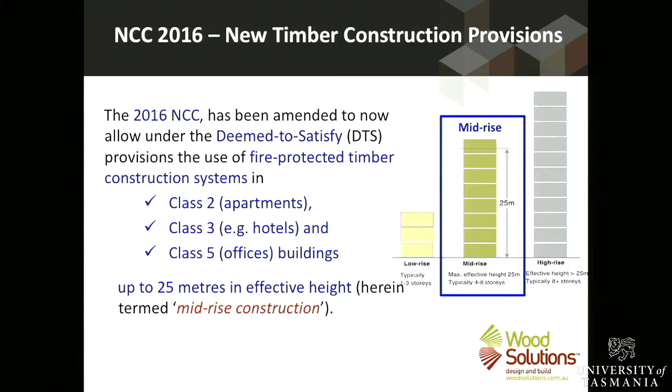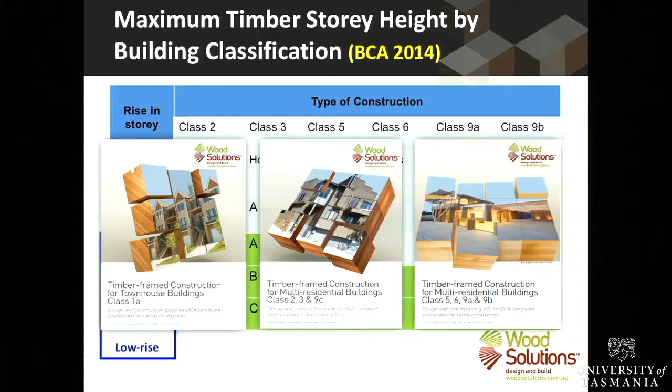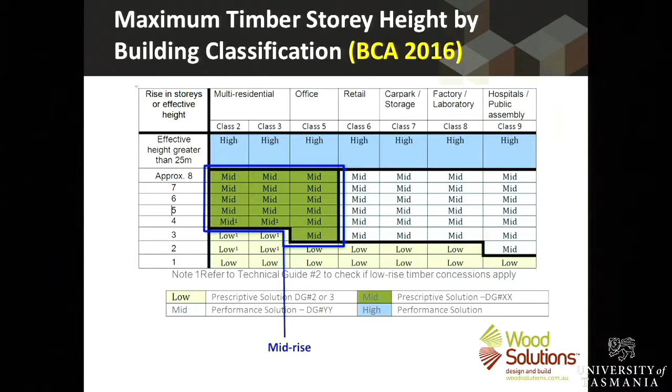The new system establishes this mid-rise construction arrangement, and then sets up a series of concessions which allow you to use different construction arrangements to get to that 8-storey, 25-metre mark. That's covered in this new guide, Guide 37.

There's now a lot of these timber design guides. They're very useful and cover a wide range of topics. If you're not logged in or don't have a registration on the Wood Solutions site, I encourage you to log in and get one. It's all free, download the guides relevant to you. They deal with everything from interior design, external finishing, fire separation, and different construction systems, and they're all pretty easy to use.

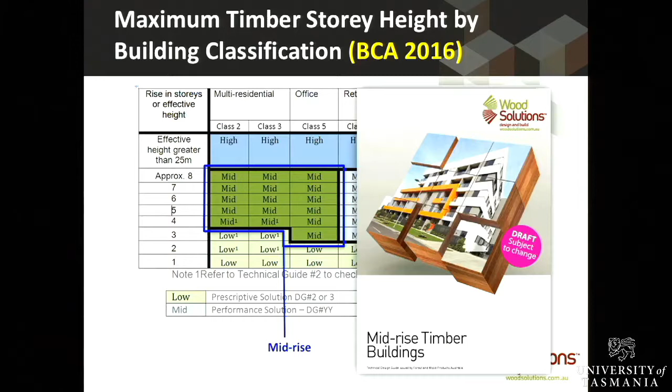The new DTS provisions cover traditional lightweight framing options, plus what it calls massive timber systems, such as CLT, glulam, and LVL. It consists of using appropriate layers of fire-resistant plasterboard to make what it calls fire-protected timber, combined with a compliant sprinkler system.

So what it gives you is a whole range of opportunities for class 2, 3 and 5 buildings, and ways in which they can be constructed.

So if we just look at some of the construction options that are available nationally.

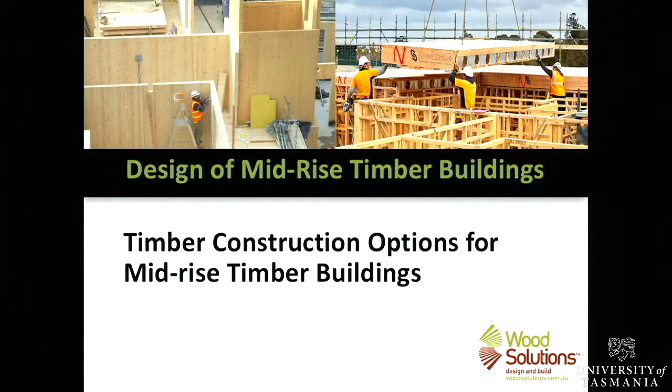We've got general framing systems, basically taking single elements and using them to make either a structural frame or a wall frame. We've got lightweight frames, heavy timber post and beam, post-tensioned portals. There's massive timber, which is panel walls or floor systems, and then a range of modular systems. I've got a slide on each one of these.

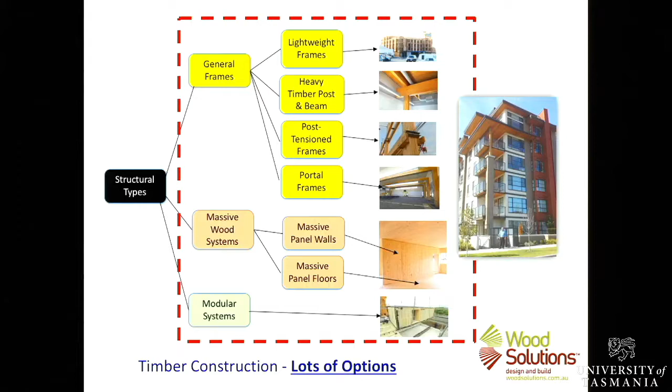If we look at some design approaches with class 2 and 3 buildings, they tend to be honeycomb style construction, with relatively close walls - honeycomb type structures. We're not dealing with posts and open floor plates, and these can be constructed in several ways.

One way is to use lightweight construction up to about 6 stories. This is an adaptation of a standard timber frame wall, where you've got two wall systems side by side to give you sound separation between apartments, using double studs. You use double studs because of the compression from loads above - a single stud won't do it. You could try to buy a bigger piece, but no one generally makes them, so everything's cut at a 35 or 45 size, and you just double them up.

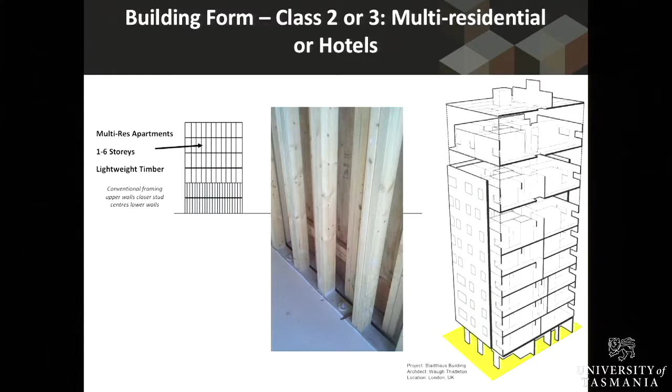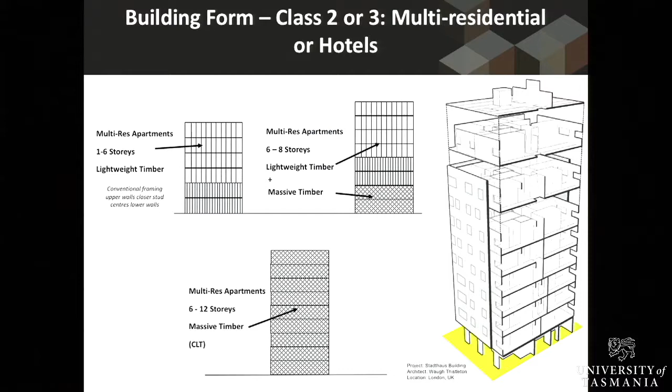Other approaches are to use lightweight above and massive timber below, so that on floors with higher loads, as you move down you go to full massive timber systems, or you use full massive timber all the way from base up. There's also ways to take a combination of concrete and timber systems, with concrete on lower levels for things like car parks and retail, then a concrete plinth with your timber frame directly above that.

There has been sufficient practice in multi-storey timber construction now in Europe and other places that a lot of the jointing systems needed to get very high shear values in some of these panels have now been resolved, and they're actually available in the marketplace if you know the right people to ask. I'm one of the right people to ask - I can't deliver any of them, but I can point you in the direction of people who can.

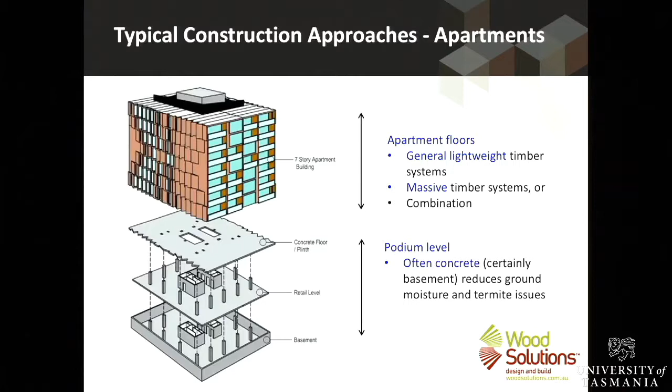Others use heavy timber post and beam with glulam or CLT. That's the Lend-Lease building, the Docklands Museum, Docklands Library - predominantly a glulam building with CLT floor plates and CLT shear walls in the centre. You can see from the basic structure, we've got shear walls in the middle that are CLT, floor plates between the glulam frames, and large glulam columns. They all came as a package. Then we've got portal frame systems.

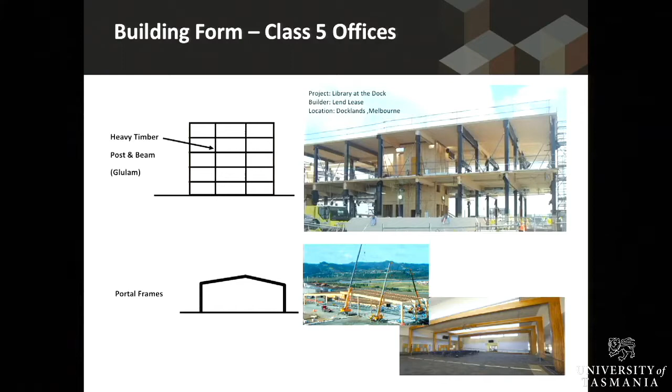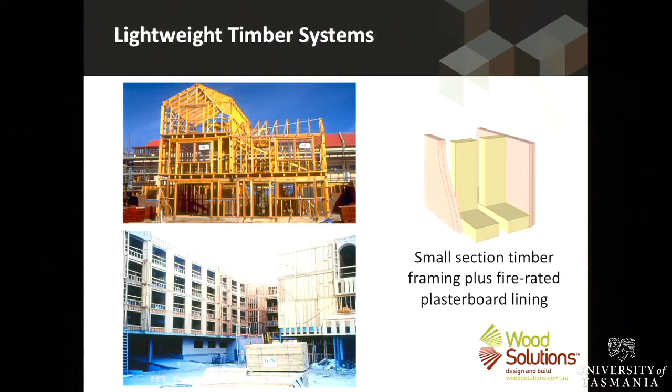If we look at other frame systems, we've got the lightweight timber systems - effectively standard stud framing arrangements. This was the traditional method for building up to 3 to 5 stories, an extension of house construction but with lots of extra detailing. This arrangement here is concrete floor, 4 stories up - I think that one's in Melbourne.

You've got post and beam construction using LVL and glulam. Now these panels here, and the ones in the shear walls, aren't CLT - they're actually large panels of glulam side by side. So you don't have the cross laminates, only boards arranged vertically, which forms large flat beams or shear walls that you can use. These are projects in British Columbia.

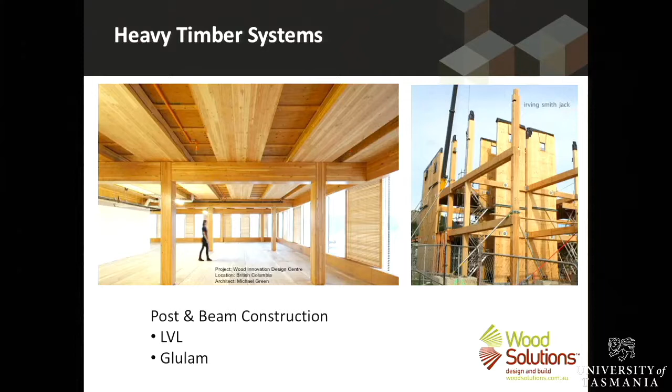There's then post and pre-stressed LVL and glulam composite beam systems. This is put together as a system called Expan, funded jointly by Forest and Wood Products Australia and a similar organisation in New Zealand. Effectively what it does is take large-scale timber elements like this and combine steel tendons in the system to allow you to build relatively flexible joints in the structure.

It was specifically designed for resistance to earthquakes in New Zealand. This project actually started prior to the big earthquake in Christchurch. Several of the buildings built in Christchurch in the recovery effort have used this system because they can sustain another earthquake and then just be tightened up again. You incorporate the steel tendon in a box beam like one of these, or you can expose it underneath, etc.

It's an adaptation of quite an old technology, very common in Victorian buildings and other types of buildings over the ages, but here used in a much more sophisticated manner. The design software and detailing is all available through FWPA. They've just released a whole series of guides on this system, if anybody's interested.

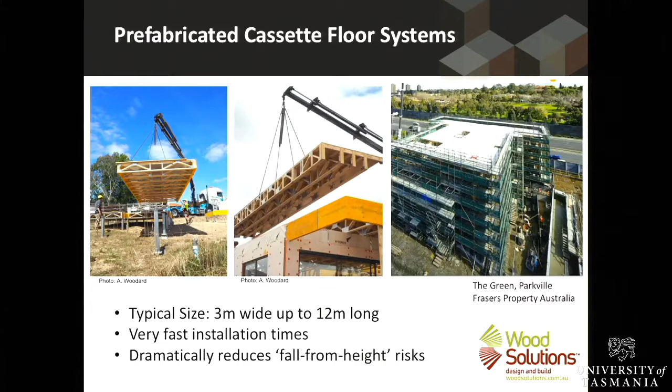There's a whole range of prefabricated systems being used. These ones are relatively domestic scale, being floor cassettes. Larger scale ones were used in a job in Parkville in Melbourne, with spans up to 12 metres.

There's also a whole series of concrete timber composite systems that are now being used or proposed. In some cases in Australia it's basically being proposed, in other places they're being used. This is an old photograph of a system whereby joists were put down, plywood was put on top, and shears - actually just coach bolts - were put in at regular centres, and then a concrete topping was put on top. For this instance it was good, giving better fire and sound protection between the two.

The Europeans, who are using much more wood in their construction, have developed a range of different systems using new generation glues, where they put a saw cut through the top of the timber, like the top of the glulam beam. They then insert an expanding polyurethane glue with a punctured steel plate, specifically coated and designed to take shear, and use that simpler system to create composite timber concrete constructions. So there are a range of different options available, and if people want to see photographs of any of these systems, I'm happy to pass them on.

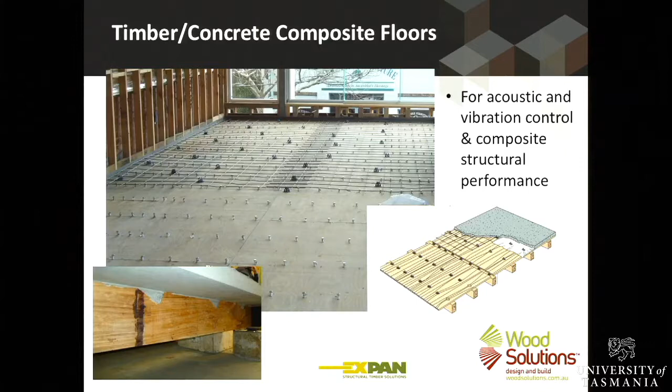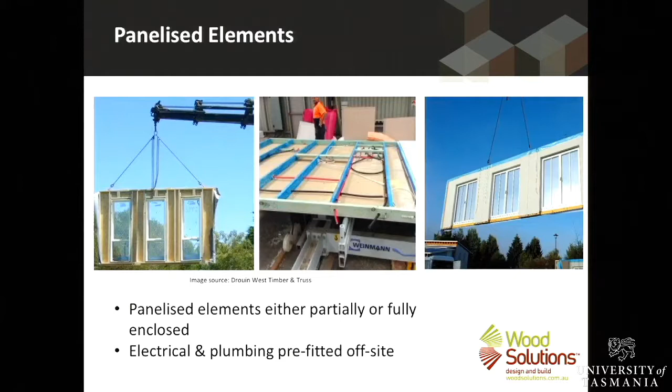There are also panelised elements. These are pretty simplified ones, which are just frames with simple services in them. But they scale up quite quickly, or there's full modular type systems.

This is one of the apartment modules made for the NRAS project in Launceston, finished in a factory, brought to site, plopped one on top of the other, finished off. And that's the building there with all the modules in place, the roof on, just before it was clad.

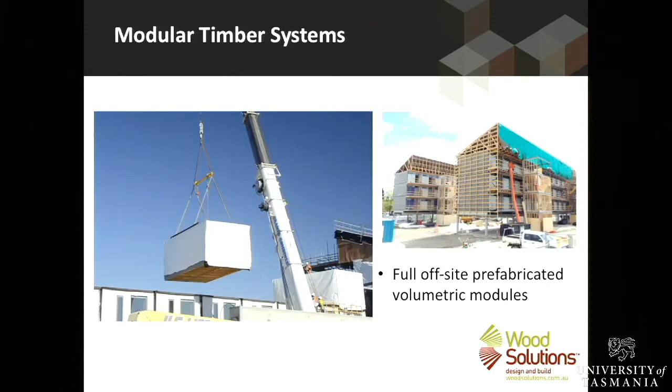We worked with James Morrison's office as part of this design team. So anyone interested in this sort of construction system, we can provide some first-hand experience and details on this. There's a wide range of timber construction options that exist to use in multi-res.

Now I don't think we actually calculated exactly how high we could go with those modules, but I reckon we could have easily gone 3 to 5 stories before we had to reinforce the whole system. So they were pretty robust little boxes. And there's significant efficiencies, speed and cost benefits by using some of these systems, especially as skill in using them develops.

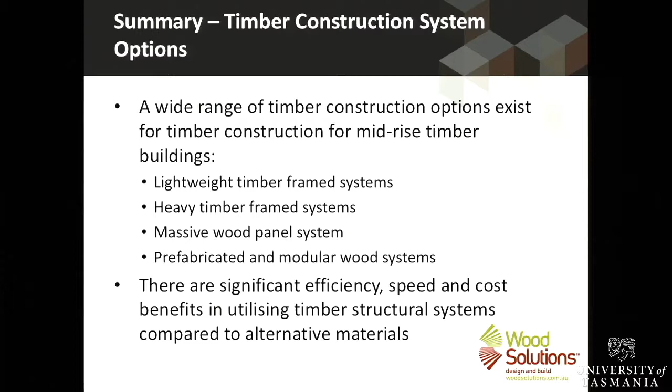So if we look now at the NCC changes. The NCC is the National Regulatory Framework for Construction in Australia. There are 2 volumes. Volume 1 deals with classes 2 to 9. Volume 2 deals with class 1. Class 1 is effectively houses and cottages. So for class 1, usually if there's a professional involved outside of a ground engineer, then it's basically volume 1. So with all mid-rise timber construction or mid-rise building, you're dealing with volume 1.

There are 2 ways in which compliance can be shown. The NCC is a performance-based code, which means there are parameters set that you need to comply with, and there are two methods of doing that.

The first is to use a deemed-to-satisfy solution. That's a cookbook approach that says if you follow the rules set out in the document, then that's deemed to satisfy the performance requirements. The other way is a performance solution, also known as an alternative solution, which says we're going to do something different, and we're going to show that we satisfy the performance requirements by calculation, modelling, etc., to a level that demonstrates at least similar performance to the performance requirements.

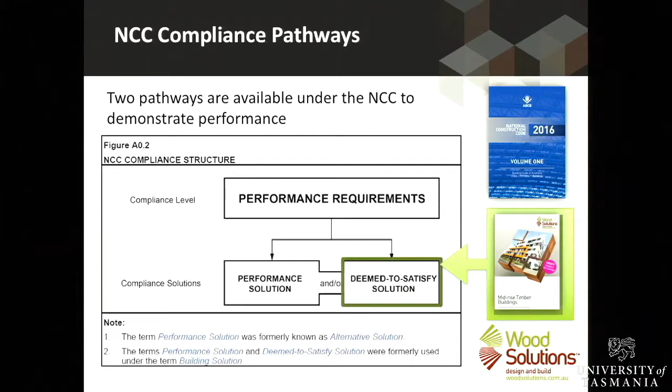So the major changes as regards timber in the NCC, there are 6 major changes. The first is an inclusion in the definitions of what fire protected timber and massive timber are. The next is a new specification A1.1 for fire protected timber, which defines what they are and how they perform. Clause C1.13 gives you the concession that recognises timber construction systems as equivalent to other forms of construction.

You'll then have a variation for type A construction, which is the most rigid of the 3 construction systems required in the NCC. There's another modification then to type B construction, which is the second most stringent. And lastly, there's a specification that deals with cavity barriers - something they're going to mention a lot tonight, cavity barriers, etc.

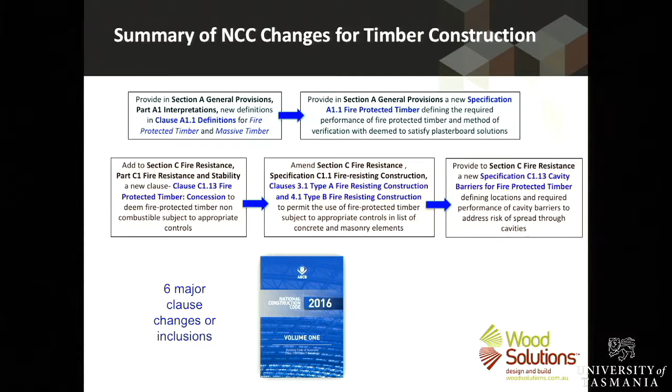So the key words that come out of the key concession that allows you to use timber in these types of buildings are these: you've got fire protected timber, class 2, 3 and 5 buildings - that's all it's allowed for. We've got particular FRL requirements. We've got an effective height of no more than 25 metres. We've got to have a sprinkler system. Any insulation installed has got to be non-combustible, and we need cavity barriers.

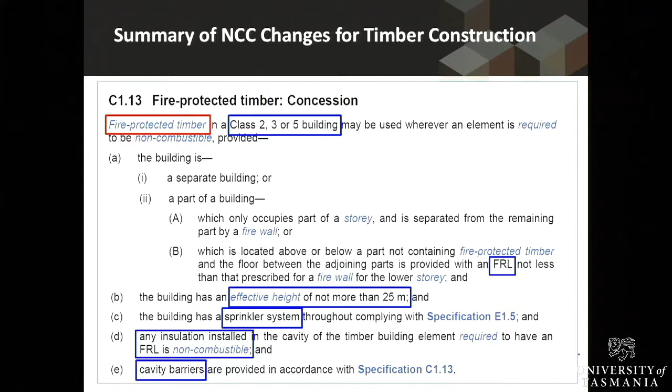With fire protected timber, we're going to be using fire grade plasterboards to delay or prevent the ignition of any timber elements that are serving a structural function, in the event the sprinkler system fails. So if the sprinkler system fails, the structure will still perform for the required period of time to let people get out. It's a belt and braces approach.

The response will be similar then to non-combustible elements. It's worth reflecting that if you have a fire in a steel building, a concrete building, and a timber building, then the consequences of all three should be identical if they're compliant structures. Everyone should get out safely, that's the first thing. And the second is that at the end of the fire, the buildings are totaled - the steel building's totaled, the timber building's totaled, and the concrete building's totaled.

The spalling you get from most fires in a concrete building are going to see at least significant reconstruction of the building, and if it's in the bad spot, basically the demolition of the structure. So there is no difference in performance required by construction system. The consequences of each fire should be identical.

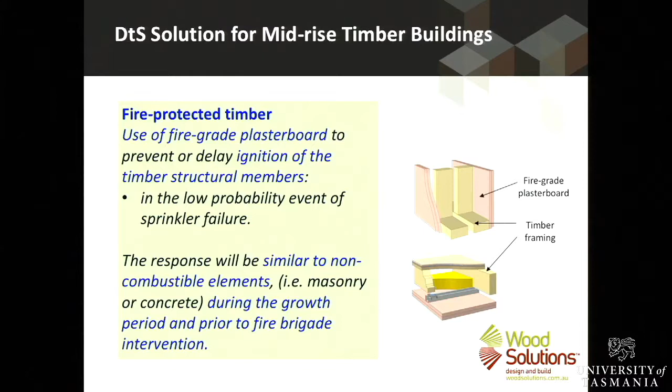Lightweight timber construction then gives you timber frame, which is either 90, 120 or 140 by 35 or 45, depending upon the amount of load it's taking above. And then typically with 2 by 13mm fire-rated plasterboard on the walls and 2 by 16mm fire-grade plasterboard on the ceiling.

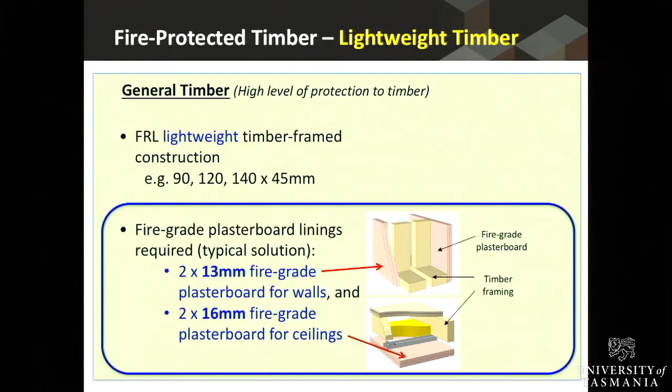The ceiling has got to be thicker because that's where the heat's going to go. The walls are subject to less heat than the roof, and the floor there is no requirement for because the fire goes up and that's where the heat goes. The fire doesn't burn down. So in many of these buildings there'll be a fire, and given that it starts inside the room, the floor will be relatively undamaged.

For massive timber, there's a couple of key requirements. The first is the system's got to be a minimum of 75mm thick. So any timber system you can get solid 75mm thick is likely to pass - that means glulam at 75, LVL at 75 if someone makes a 75 LVL, and also CLT products.

Now at the moment, the dominant maximum size of LVL in Australia is 65, 63 I think. But I suspect now that these have been released, there are plans to actually put a 75 on the market, because it does open up a lot of opportunities for LVL in these forms of construction, especially given how little glulam production capacity there is in Australia, especially for big sizes.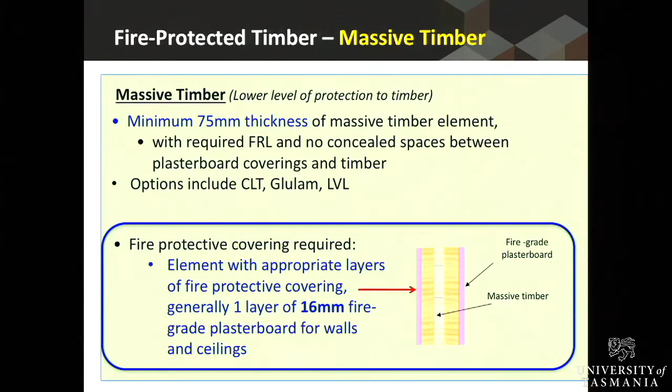So the next major thing then is cavity barriers. Cavity barriers are there to prevent any gases, fire, etc. that does get into here from going up in between apartments and in through the floor spaces and into the apartments above. So it's to stop what's called the incipient spread of fire, which I'll deal with in a bit more detail in a minute.

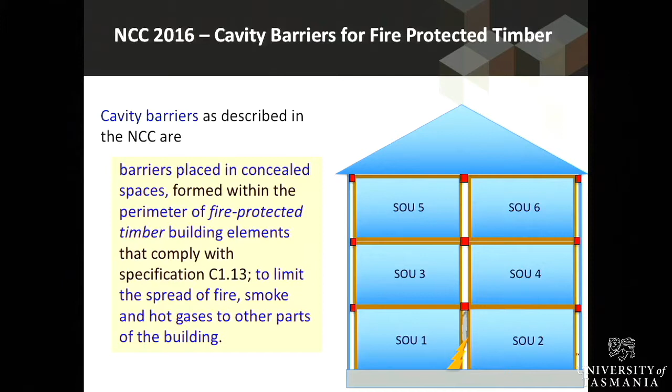So the cavity barriers have effectively got to be between every sole occupancy unit - between the sole occupancy unit and the outside cladding, between one and the other on different levels, and between the sole occupancy units and the roof or any other open spaces. So basically, these are the key spots, and the details available in the guide will show you where the cavity barriers need to go.

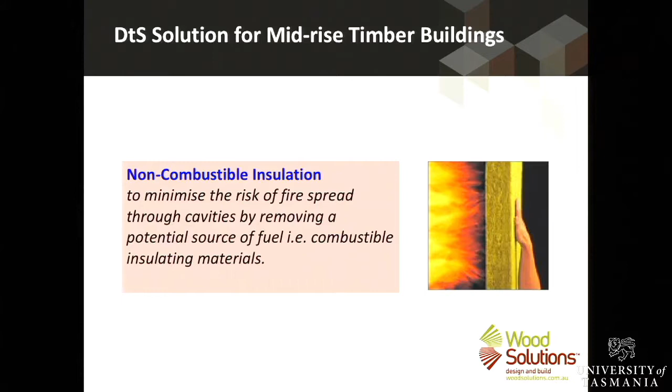Okay, so then the next major requirement then is non-combustible insulation, because there's a lot of insulation built into these systems, and it can be a nasty source of fuel. Okay, so we're going to go through each of these particular points again a couple of times.

So if the building or building part is class 2, 3 or 5, its effective height no more than 25 metres, it has fire protected timber, automatic sprinkler system, non-combustible insulation and cavity barriers if applicable, then it can meet the deemed to satisfy provisions for mid-rise construction.

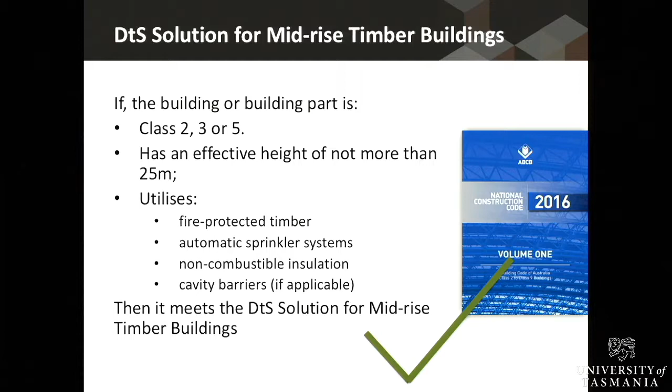Now, as soon as you move away from that and you want to go to a performance-based solution, there are various alternative solutions set out in these guides, which will help guide how you get your alternative solution through.

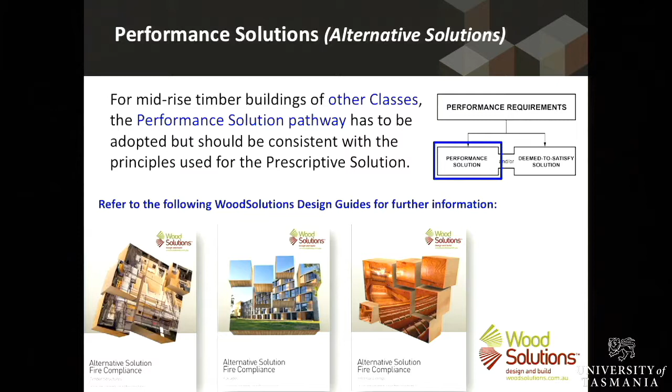So if we look at some key terminology, that is the key information. In the back bit, we're going to discuss what information you need as a professional to give through to people. But the key things we need to discuss and understand are fire resistance levels, resistance to incipient spread of fire, and the results of non-combustibility tests.

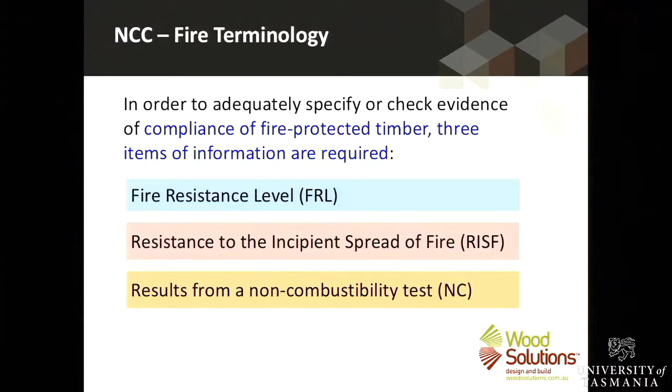Integrity is that it stops the passage of flame from one apartment to the other, or one unit to the other, for the required period of time. Insulation is that the temperature on the other side of the wall doesn't go up sufficiently to actually start a fire or cause an injury to someone on the other side of the wall. So that means if you've got a bed on this side and the bedroom on the other side is burning, you should have the period of time set down in the BCA where you're still safe on the other side.

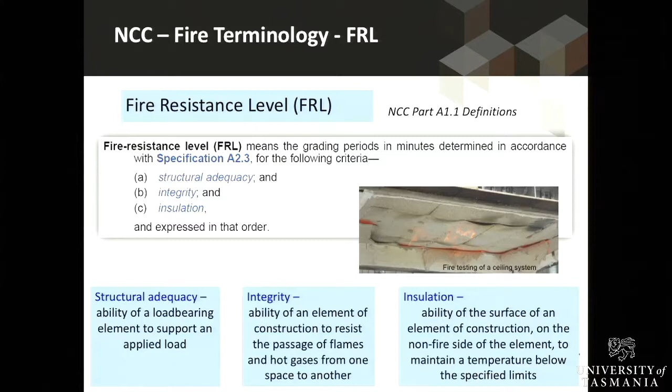Now, with all timber construction, FRLs are achieved generally by materials working in composite as a system. So you'll have either very, very thick timber, or timber and plywood, timber and particle board, or nail plate trusses and plywood, or some other combination of sheet material and timber structure.

Now, a resistance to incipient spread of fire is the relation to a fire protective covering, meaning the ability of a covering to insulate voids and interfaces to limit the temperature rise to a level that will not permit ignition of the timber and the rapid and general spread of fire through any concealed spaces. So a fire on this side will not cause the timber on the other side to ignite, or allow things through, or allow any of that structure to ignite. And there are specific requirements for it.

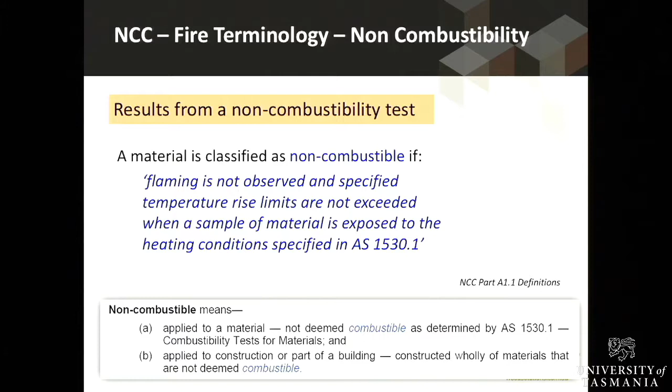There's also a non-combustibility test, which is important for insulation and other things you're using in the system. Effectively, the material's got to be tested to AS 1530.1 to show that it's non-combustible. Now, of course, these all become important when you're writing any specification for the system, because the tests have to be called up and certificates to those tests have to be secured.

So you may get this sort of nomenclature appearing in the guides and on documentation - an FRL of 90-90-90, a resistance to incipient spread of fire of 45, and that it's non-combustible. So certificates may also include such abbreviated nomenclature to show what the system can do.

So if we look at what's actually required under the NCC for class 2 and 3, the general requirements for FRLs are 90-90-90 - that's 90-minute structural adequacy, integrity and insulation - and a resistance to incipient spread of fire of 45 minutes. For massive timber, it's the same FRL, with a reduced resistance to incipient spread of fire. For class 5 buildings, it's 120s and 45, and again 120s and 30. Now, if it's concrete, it's exactly the same - the FRLs are identical and independent of material. So the system has to provide it.

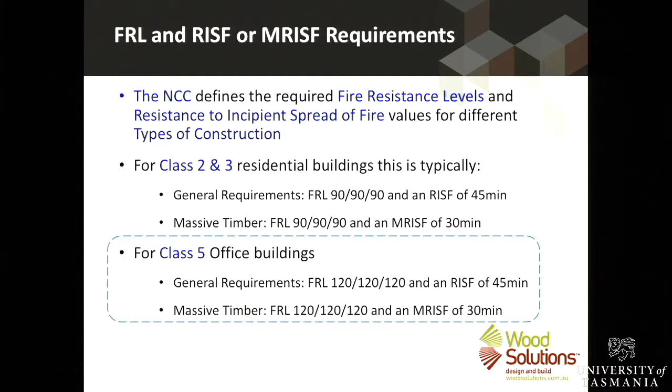Okay, so sound requirements - there are particular requirements for sound separation throughout the building. That's for both airborne and impact sound via the floor and wall systems, so those requirements exist between adjoining SOUs, sole occupancy units, and between sole occupancy units and the common spaces, and between the SOUs and other building classifications. So there are requirements here, and there's also requirements at the top where you've got some store or other function or plant room that isn't an SOU.

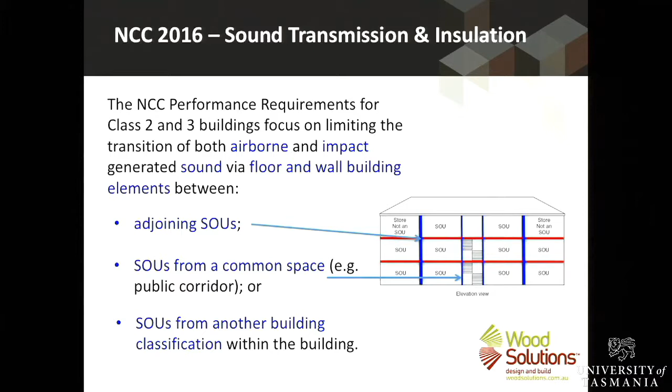So the two things are airborne sound and impact sound. Airborne sound is me on the microphone, or the teenager next door with the speakers, or people talking, or loud music, whatever, in the adjoining rooms, where the energy comes from the air into the wall system and then has to move through the wall system.

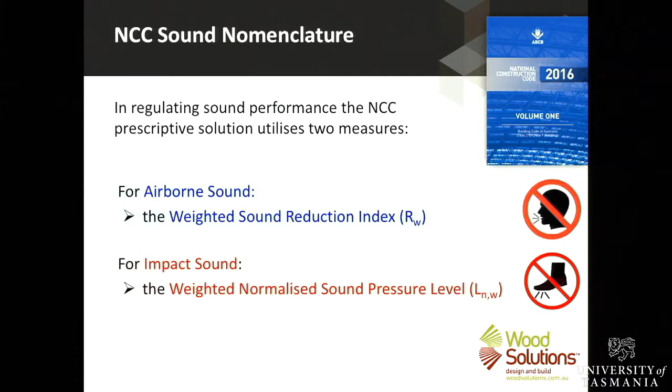But the major one is actually impact sound. Impact sound is the sound you get in structures from knocking, such as washing machines or dryers banging against the sides of cupboards, people putting plates down, pipes, hydraulics going through pipes, etc. These can all generate impact sounds which will travel through a structure.

Now, there's various requirements built into the NCC. Don't ask me to tell you what those ones mean - it's moved on well beyond me being able to translate some of this stuff. So what I will tell you is that the requirement is 50, and you'll get it from a system.

The harder one is the floor systems, because the major sound there is impact sound, the sound of people walking. In terms of building quality, impact sound, especially floor sound, is probably the most critical thing in people's assessment of having a quality building.

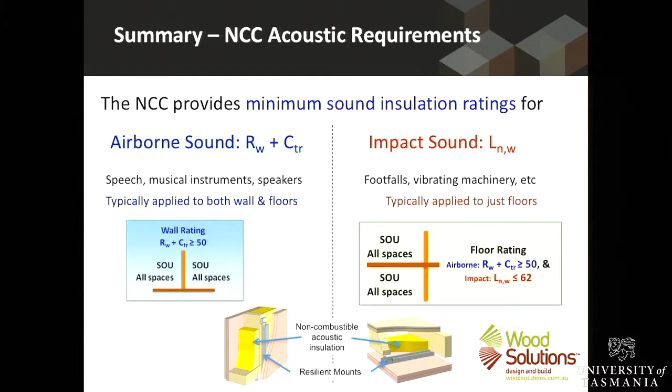Okay, so if we're looking at design for building services - and Stuart brought this up earlier - it's a key part of design. It's really quite critical that in the design you try and work strategies in the way you're providing your services, whereby you minimise or just don't compromise the fire and sound separation systems. You really only want it to occur with absolute necessity - you don't want to do it flippantly.

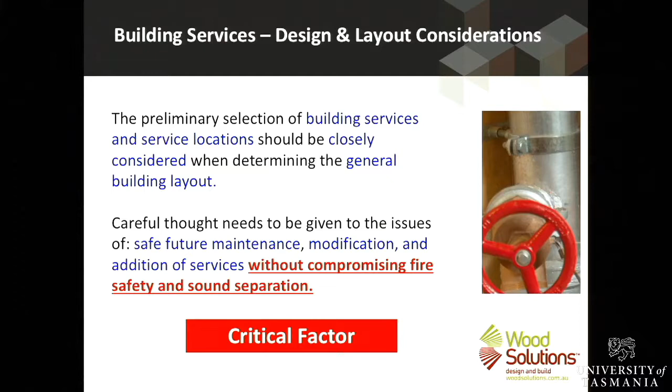So the way in which you treat your planning so that your services can be put in and maintained without breaking down fire and sound separation barriers becomes quite critical. The number of service penetrations through those systems should be minimised as much as possible.

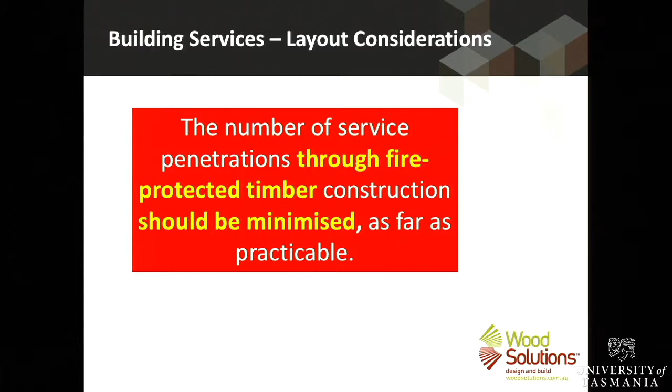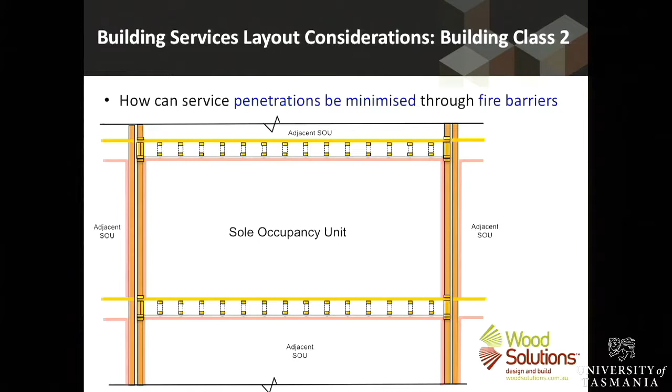Now, ways in which that can be done - if you take this as your sole occupancy unit, here's your fire boundary layer, and you really don't want to puncture that this way at all. Again, you want to try and not puncture it this way either. So there are particular ways in which that can be done.

One is to put in false ceilings, especially bulkheads over things like kitchens, service spaces, and hallways, whereby you can get lights, downlights and other forms of services through. Another is skirting ducting, where you actually use the floor void as the means of getting services from one location to another, because there's no fire separation between this layer and there, so you can come up through the floor easily.

The other approach is that you try and get your plumbing out the back, positioned close to a duct. That's one of the key bonuses of products like floor trusses or I-beams, because you can actually route out the I-beam to take your services before putting them into the floor. Or with nail plate trusses, like floor trusses like this, you can design all your flooring and servicing systems, and they'll accommodate that in the design of the trusses, coming with those spaces already prepared. So that's a critical part of design.

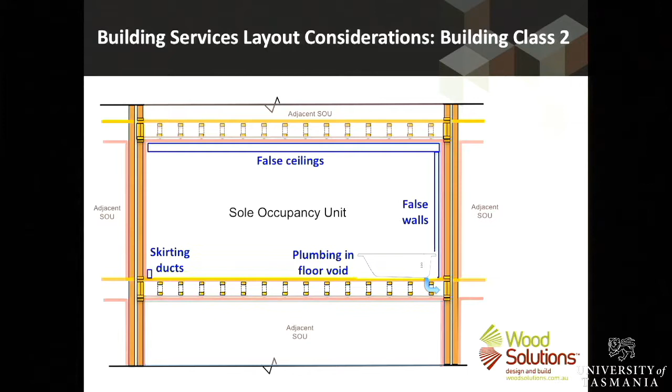When you move outside of your apartments into the general lobby circulation areas, you're looking to create ducts, vertical risers and horizontal risers that allow you to put your services in and maintain them, while getting minimum disturbance to your fire separation systems.

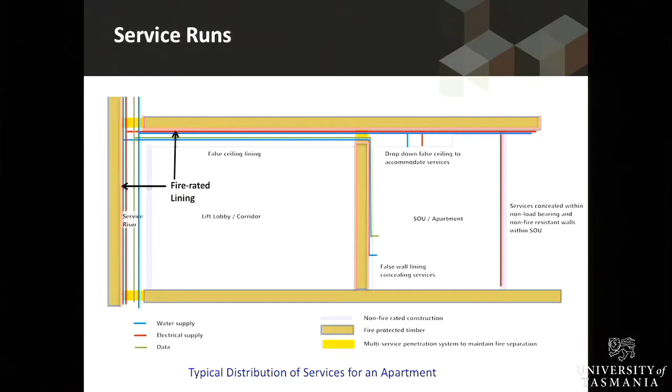Here we've got ducts through a service riser, which could have a plasterboard enclosure, and still have fire-rated openings so you can get in there and maintain things. You can run across the top and then punch this through a hole that you fill with fire-rated blankets, pillows, or fire collars.

If you use drop-down ceilings and false walls inside your apartment, you can effectively put all your services through without breaking those layers, or as little as possible. So part of the design approach is to always try to get your services on the inside, non-load bearing walls, and bring things up through the floor, which solves a lot of problems.

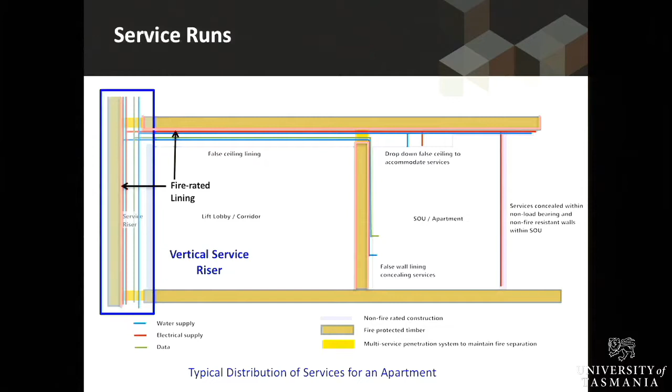Okay, so that disappears. All right, I think it's time for a cup of tea.

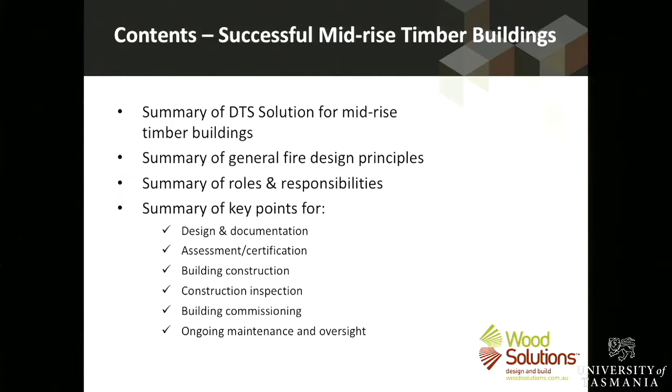Looking at the summary of controls: the building or building part is class 2, 3 or 5. It's got an effective height of no more than 25 metres, a sprinkler system to spec E1.5, fire protected timber, non-combustible insulation, and cavity barriers to that specification, or with massive timber construction that has no cavity barriers because there's no cavities.

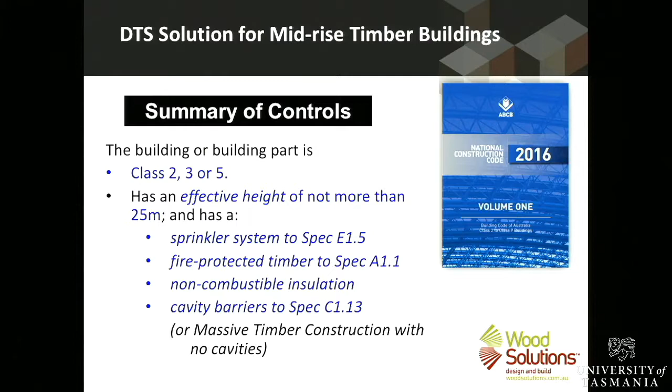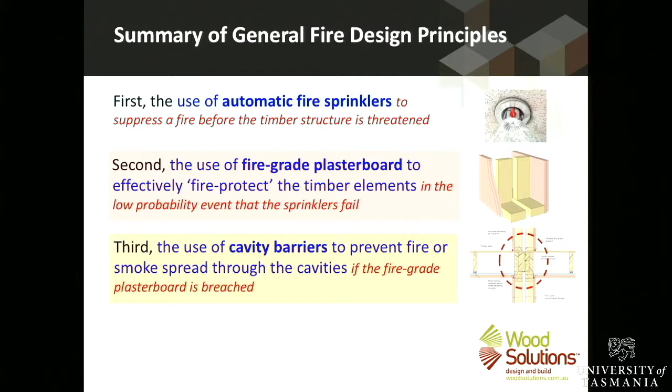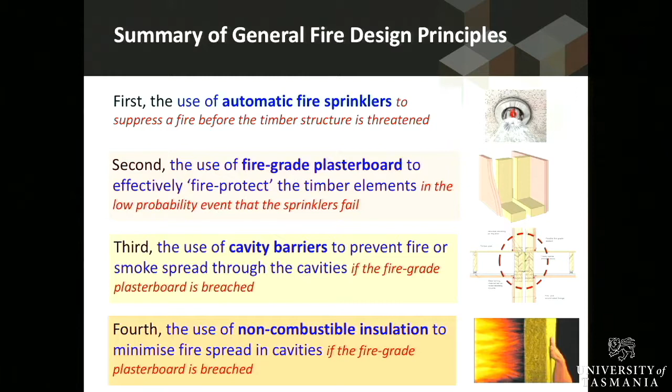There's a number of critical layers of fire protection. The first is automatic fire sprinklers, regarded as the key fire protection system throughout the building. The second is the use of fire-grade plasterboard to give fire protection to the timber elements. You've then got the use of cavity barriers to prevent fire and smoke spread through the cavities. And lastly, there's the use of non-combustible insulation to minimise fire spread in the cavities if the fire does get in.

In roles and responsibilities, there's a building procurement process, and the various roles and responsibilities through that process become important. If people are doing this for the first 2, 3, 4, 5 times, people along the supply chain aren't necessarily going to be experienced enough to know that you can leave out particular requirements and still get it right. So over-specification, or being overly prescriptive initially, is probably a very good approach.

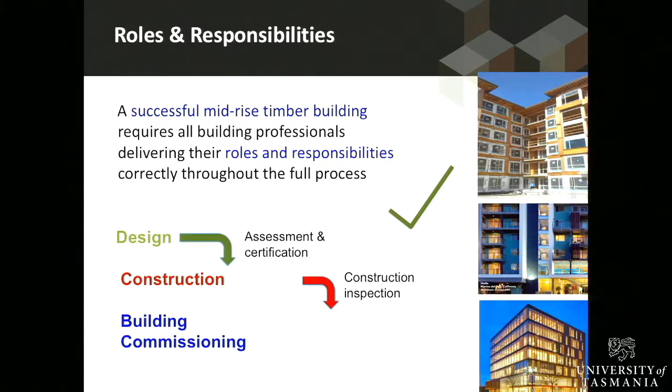At the beginning, the roles and responsibilities of the design team need to be clearly established for design and documentation, assessment and certification, building construction, inspection during construction, commissioning and maintenance. There are various people involved in each of those stages. In the bits we're going to do in a minute, we're going to cover the first four, but I'm not going to do the last two.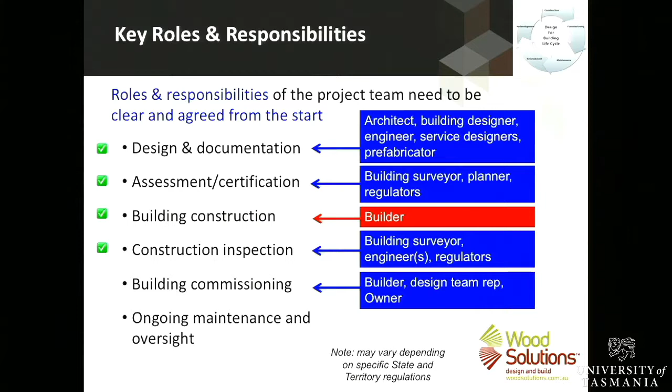So with design and documentation, we've got the project design team who become critical in the selection of systems that are deployed and in their detailing. Key issues include ensuring all the fire protection elements are clearly documented in the system - that's sprinklers, fire protective linings and claddings, cavity barriers, insulation, etc.

You've then got to have good evidence of suitability for all the product systems being specified. That becomes important, and that's why I've harped on some of the specifications and standards, because that level of information needs to be collected - it's going to be provided up the line, and it's also going to set the boundaries of what the builder is going to be held to do later on in the process. So looking at team responsibilities is then important.

The next thing is the design team should engage with the key construction team representatives early. Now, the key construction team is obviously the builder, the timber structural systems prefabricator, assuming that there is one, and usually there is, and then service suppliers and lift suppliers. Now, it's quite common for some of these people to start to be put in as nominated subcontractors, but it's less likely for the others.

With building then, it's important that all on-site staff are suitably trained, knowledgeable and competent in relation to the mid-rise timber building requirements. Now, they're new requirements and therefore many builders will not know them. So that's an important point to consider, is that most will be competent with timber frame construction and with house construction and even some fiddly bits that they might have come across in a 2 to 3 story building, but they may not be competent with an 8-story one, and therefore the documentation and the briefing has got to be such that A, they know about it, and B, you can hold them to it.

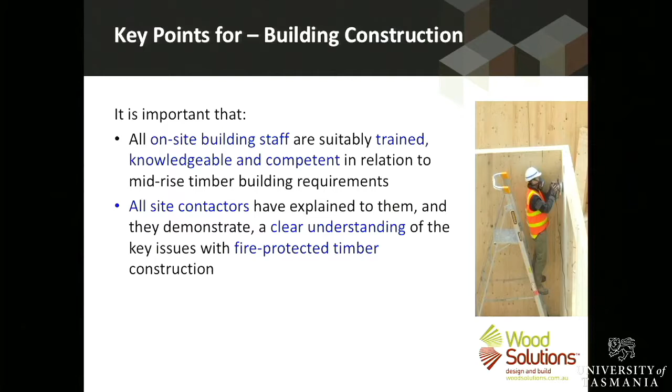So all site contractors have explained to them and they demonstrate a clear understanding of the issues of fire protected timber construction. Now, Wood Solutions is providing some information to support this, but it's all got to happen on the jobs as they go through, because as most people will know, sure, you can put it in your documentation, it will go to the builder, and then the level of control that might be able to be exercised over the builder may not be at the level that you actually want to ensure that the innovative approaches are going to work. So it's something people have got to be cautious about.

It's important that all systems be installed as per the manufacturer's recommendations, and that in itself is a bit of a challenge, especially with taller construction. Now, it often happens that because something goes to timber, it actually opens it up for a range of builders that may not normally have been considered for that type of project. Therefore, you've got people who don't know about the other general constraints that a builder who's used to these multi-story or multi-million-dollar projects would be used to.

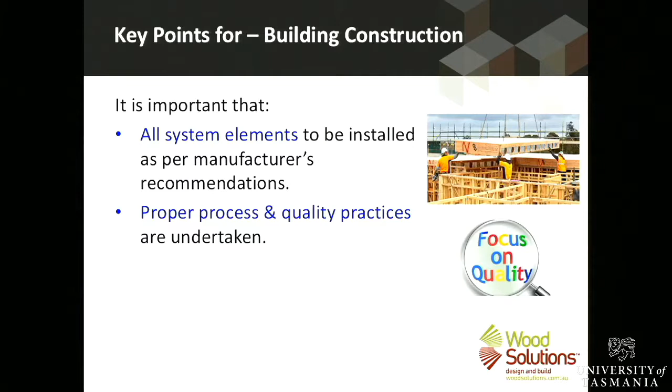And making sure that the tradespeople they know actually know what the manufacturer's recommendations are becomes important. So that proper process and quality practices are undertaken, and that on-site workers are diligent and report concerns in terms of non-compliance, especially in the early stages of systems being used.

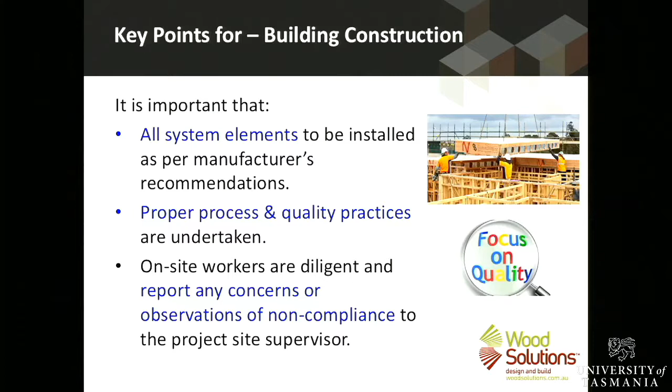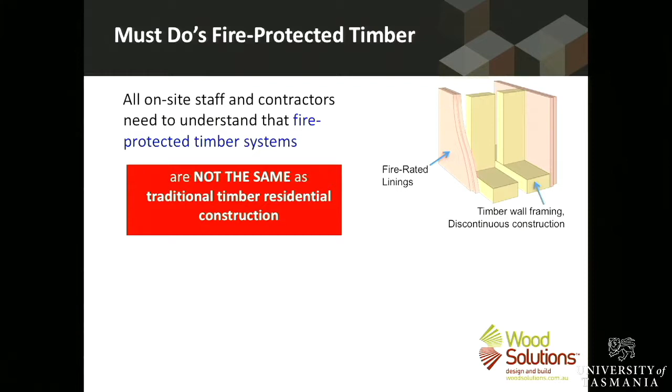So all on-site staff and contractors need to understand that fire-protected timber systems are not the same as standard timber frame construction, and it does get quite dangerous. When my house was being renovated, I had to ensure the roofer put the insulation in the right way around, and he abused me, saying this is the way I've been doing it for 25 years. I said, you've been doing it wrong for 25 years, here's the manual. Those sorts of things will occur on all sorts of buildings, and when doing innovative construction, we need to make sure those problems are avoided before they get built in and covered up.

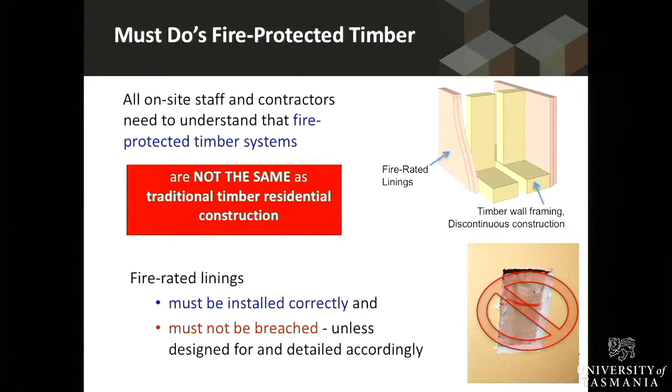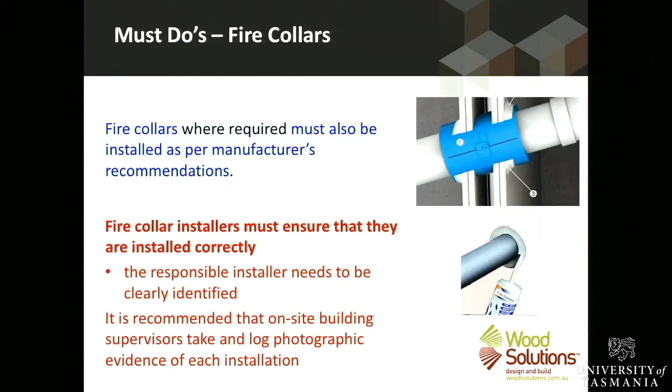One other important thing is on-site fire protection during construction. You'll get people welding or doing hot gas work on a construction site, and in normal concrete construction, they don't care, sparks don't matter. But in a timber one, the consequences of poor management of this sort of thing can be quite significant, especially before the sprinkler systems are plugged in. So there are various approaches in terms of commissioning various stages of sprinklers as work progresses, and the NCC does have specific requirements, but it is something that needs to be taken care of. There have been one or two major fires on timber construction sites in other countries.

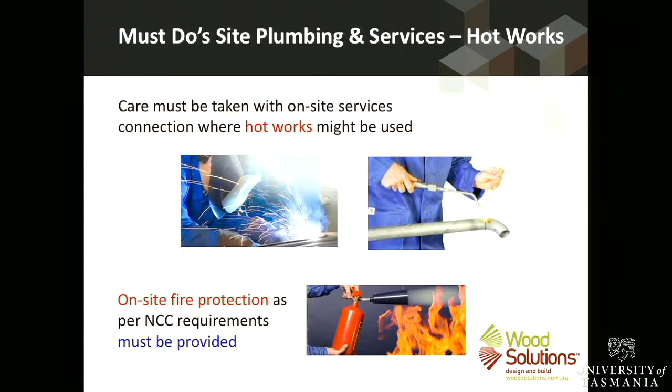There must not be substitution of compliant materials with non-compliant ones. It's pretty easy with some of the timber components to know that's obviously this thickness, that's obviously plywood or whatever. However, with insulation products, there's a long history of substitution, a long history of non-compliant stuff being used, and once it's out of the packet, it can look pretty similar. So it's very important that there be no unauthorised on-site product substitution.

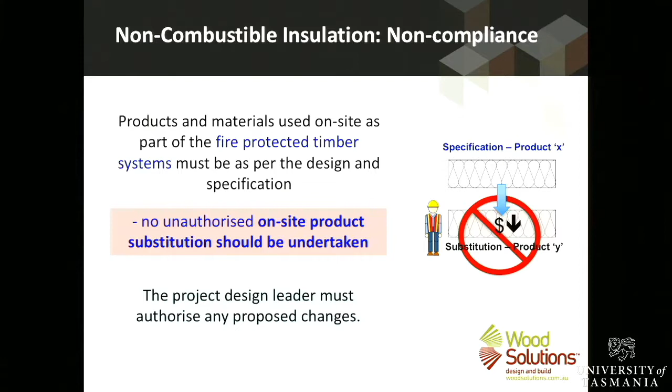Then with inspection, during inspection all the relevant fire grade products are inspected, confirming they match the specification and have been installed properly. All the cavity barriers are installed and confirmed as being installed, and the fire protection linings are all in place without unauthorised breaches.

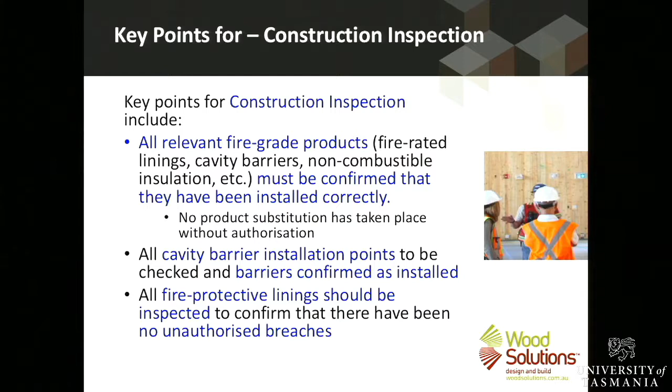So in summary, the project team needs to ensure there's a clear understanding and implementation approach to getting all the fire protection systems in place. For the mid-rise timber project, there needs to be awareness, appreciation and action in each of the stages to make sure the end product does exactly what you want. Over time, we're looking to build the expertise base of the designers, material providers and builders so they can do these things in a much more efficient manner.

It took some time for multi-res construction of two or three storeys to be more widely adopted and for people to understand how you could do it. This will also take some time for people to build their skill levels up. As designers and project leaders, you can take a range of steps to make it easier for those further down the line by being particularly dogmatic in the first projects. I think that's a reasonable approach - dogmatic first, then ease up later when people are confident in what needs to happen.